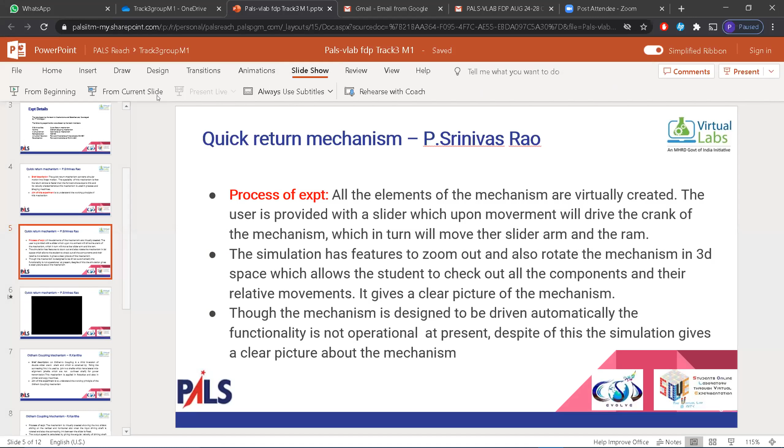The group has a mentor, Mr. Vishwas, and the group has 6 people: myself Srinivas Rao, Kavitha Madam from Alpha College of Engineering, Mr. Muthu Krishnan from KIT, Mr. Ramchandran from KIT, Mr. Arivamani Ravanan from KIT, and Mr. Paramasivan from Rajalakshmi Institute of Technology.

The lab we chose is the Mechanisms and Robotics Lab, developed by IIT Kharagpur under the mechanical engineering branch. We chose this lab because future applications will be robots, and the mechanisms supporting robots are very important, forming the backbone of robotics. These are also applied in many other applications. The simulations in this lab work fine except for a few errors; most of the experiments work very well, so that's why we chose this topic.

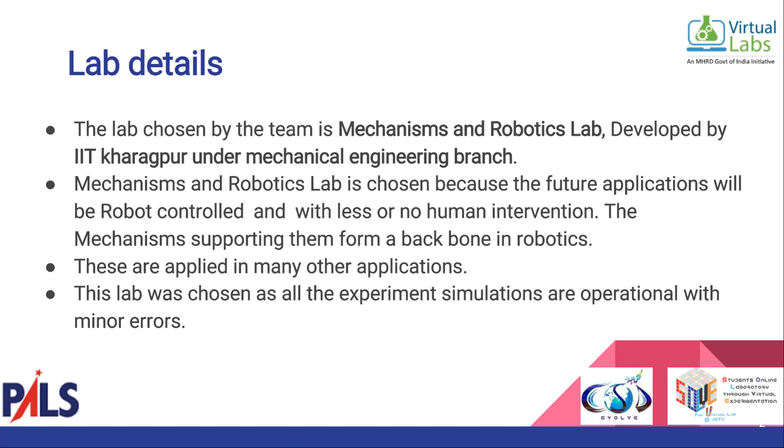The team chose the following experiments to work with. I chose the quick return mechanism. Madam Kavitha chose Oldham coupling mechanism. Muthu Krishnan chose cam follower mechanism. Ramchandran chose KGP50. Arivamani Ravanan chose forward kinematics and Move Master RM501. Mr. Paramasivan chose forward kinematics of Puma 560. These are the experiment details.

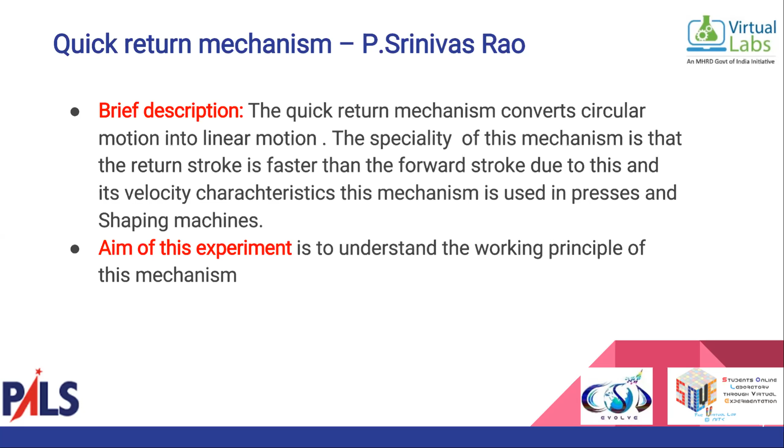I'll quickly complete my presentation, then ask the others to participate. I have taken the quick return mechanism. This mechanism converts circular motion into linear motion, that's its basic purpose. The specialty of this mechanism is that the return stroke is faster than the forward stroke, and because of this it is applied in many mechanisms like presses, shaping machines, and other machines. The aim of the experiment is to understand the working principle of this mechanism.

In this lab, we can look at the complete picture of all the elements in 3D. We can also move the slide and the crank so we can see all the mechanisms moving interrelatively, giving a complete picture of this topic. Except for that, it doesn't run automatically. Though the functionality is shown as if it can run automatically, it is not, but we can see everything in this experiment.

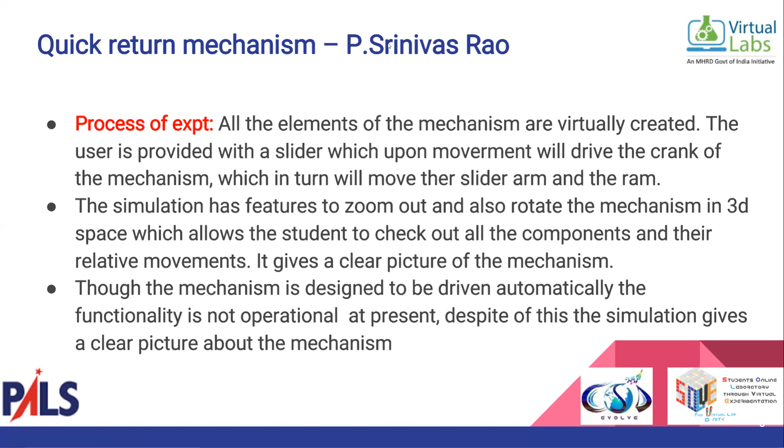Now I'll try to play this video I generated. One second, let me just... I don't know whether the video will play here or not. I don't think the video is playing. I'll play the video from our... other... Not happening.

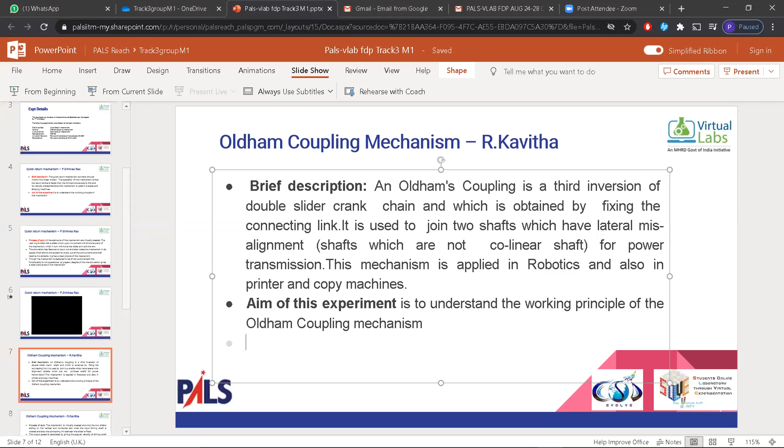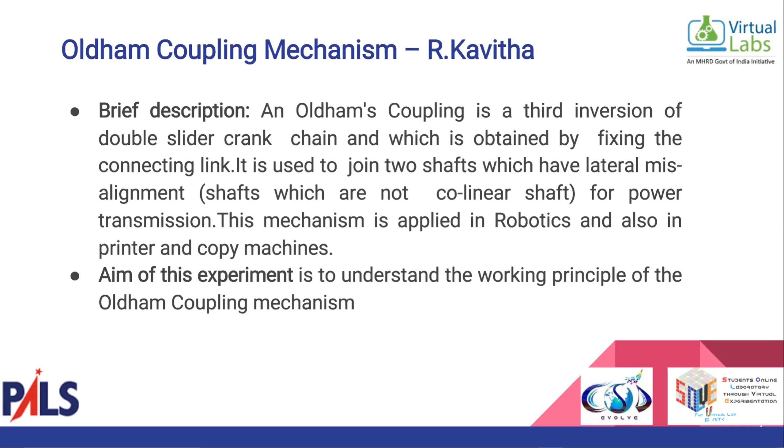I'm R. Kavitha from Alpha Engineering College, assistant professor, and I'm going to discuss the Oldham coupling mechanism. It's a third inversion of double slider crank chain, obtained by fixing the connecting link between the two sliders. It is used to join two shafts which have lateral misalignment, that is, their centers are not collinear, not in a straight line axis. For power transmission, we use Oldham coupling, and this mechanism is applied in robotics, printers, and copy machines. The aim of this experiment is to understand the working principle of the Oldham coupling mechanism. Can you go to the next slide?

And here in this particular V lab, we have seen the simulation, and it is clearly visible, and it shows the two sliders sliding on a vertical and horizontal slot when the input driving shaft is rotated, and also the connecting link which is fixed in between the sliders. The output sliding speed is calculated using the value omega of the input driving shaft in the simulation.

So the simulation has features to rotate the mechanism in 3D space as well. There is a progress bar, or a point or button, which is used for rotating the input shaft.

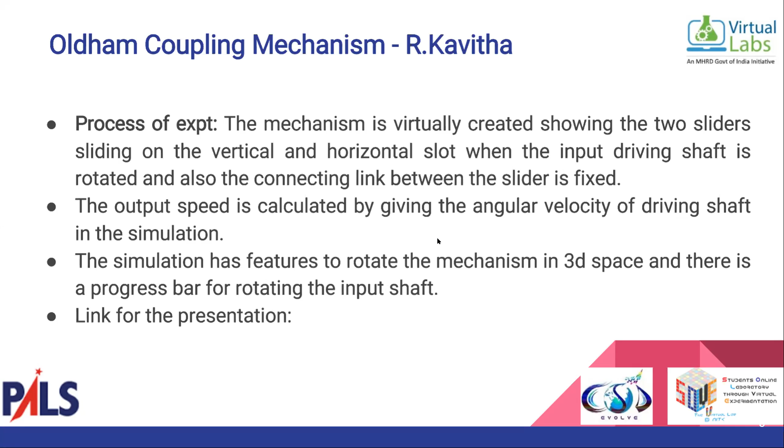Good morning to all. Am I audible? Next person can follow. Good morning to all. Am I audible? Yes, sir, you are audible. A little bit of clarity is required from your voice. The voice is low, sir. Now is it okay, sir? Hello? It's low only, sir. So can you put the mic near to your mouth? Yeah. Okay. Good morning to all.

I am Dr. Muthukrishnan from Kalaignar Karunanidhi Institute of Technology, Coimbatore. Today I am going to present about the mechanism of cam and follower. Cams are mechanical devices which are used to generate curvilinear or irregular motion of mechanical elements. They are used to convert rotary motion into oscillatory motion or oscillatory motion into rotary motion.

So here it consists of three elements. One is a driver member known as the cam, second is a driven member called the follower, and a frame which supports the cam and guides the follower. So the procedure here is a simple simulation technique. There is no experimental setup available here.

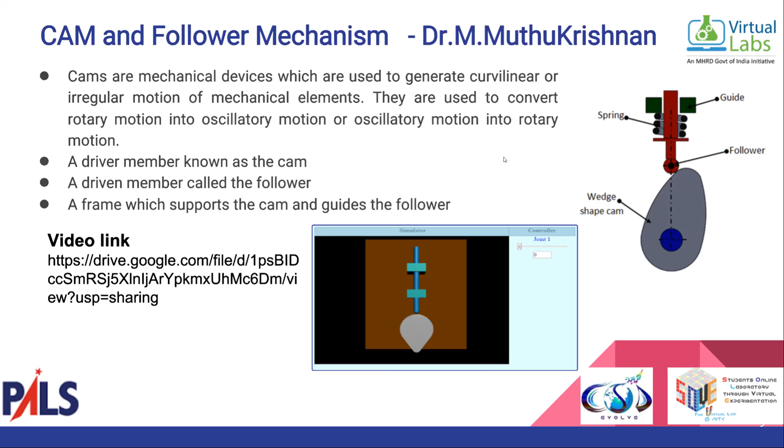Okay, sir. Now I'm going to present the introduction about KGP50, which is an industrial prototype robot. This robot has been available for transferring technology and for education purposes. And the robot has been planned for use in the development of an intelligent driver vehicle interaction simulator.

In order to have a driving mechanism, we need to have control for a number of axes. This consists of 6-axis operations, and it is able to withstand a 50 kg payload, with a reach of 1.5 meters, and a maximum speed of 1.5 meters per second. So these are the initial specifications.

Using this, we are able to move according to our wish, because the maximum degrees of freedom available there is 6. Here, we are using all 6 degrees of freedom in order to obtain the maximum. Here, each and every axis is able to be rotated.

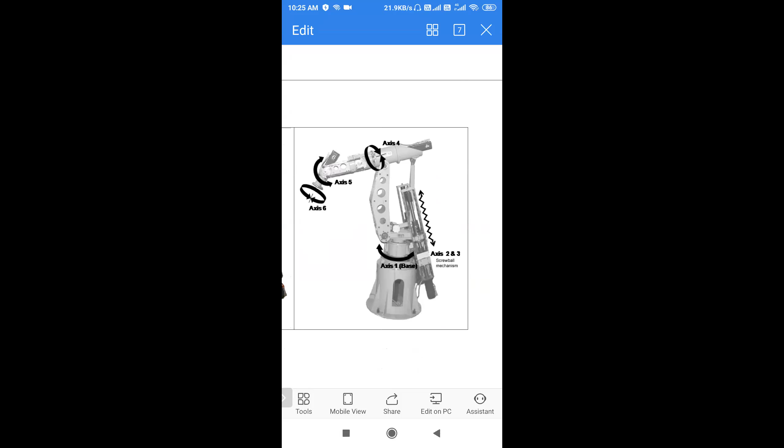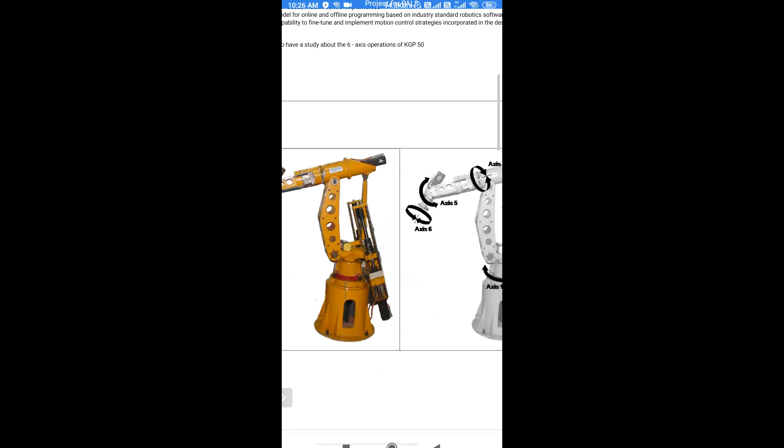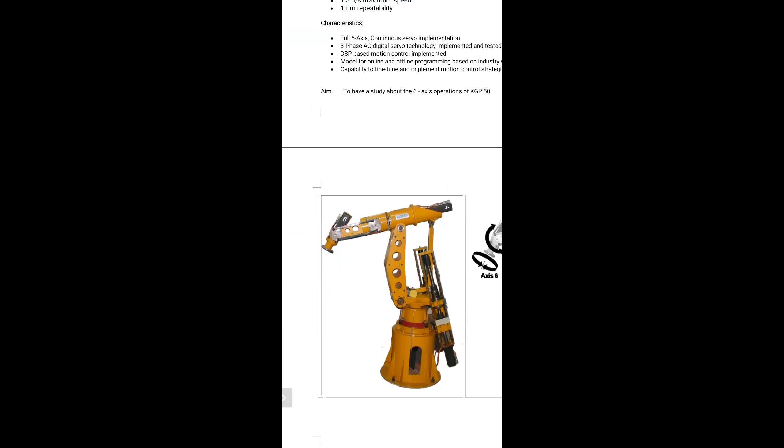This robot consists of 6 axes. The first one is the vertical axis, then axis 2 is available over here, which can make a rotation in this area, the third axis is available over here, and the fourth one is available. You can rotate this, the fifth one you can rotate this, and the sixth one you can turn a rotary slot which can hold a tool. So in this way we can make 6 rotations, so that you can reach any point.

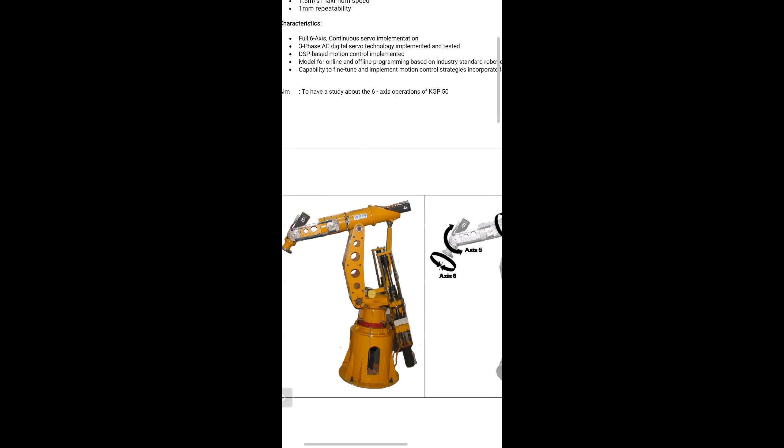It is like a 3D thing. You can achieve any point and do any kind of task using these 6 axes. You can't make everything work at the same time, because it's a very tough task. So first we can try the first axis over here. You can rotate it to the position, then utilize the second axis, then the third axis, then the fourth axis. Each can be controlled over there.

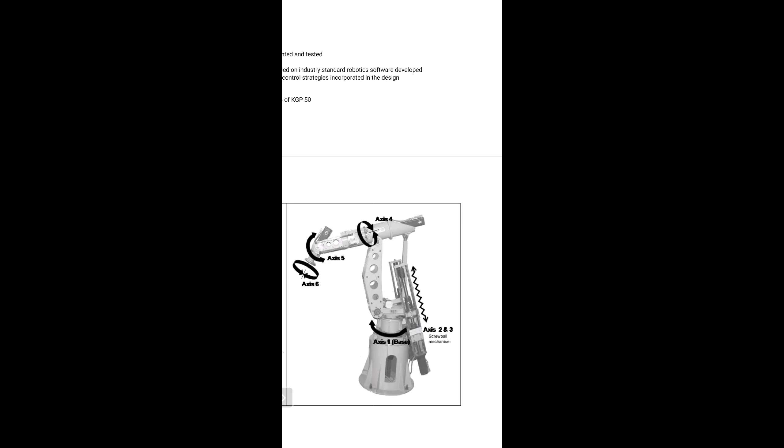If you view the animation video, you can get how it is working. You can reach any point in the space within the given reach. That is the major advantage of it. If you are effectively utilizing that, you can achieve a lot of things. Even for COVID and all those things, we can use this kind of arm.

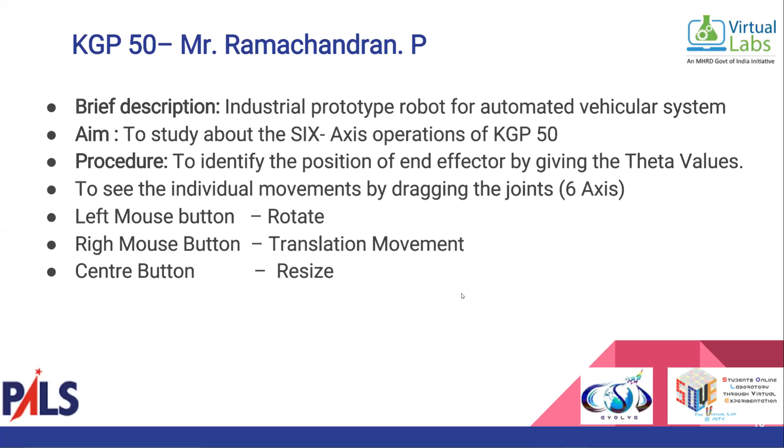Can I display the video? No, that's okay. I think they will privately see the video. Okay. We have a time slot of about 5 minutes left. Within that, your team has to complete the presentation. Okay, sir. I'll move to the next person. Mr. Arivumani Ravanan, please continue. Sir, is it audible for you? Yeah, you're audible. Fine. Hello to everyone.

I am Arivumani Ravanan from KIT, Kalaignar Karunanidhi Institute of Technology, Coimbatore. My presentation is about the simulation-oriented experimental exercise of an articulated trainer robot named Mitsubishi MoveMaster RM501. This is a basic level industrial robot with 5 rotational joints having 5 degrees of freedom. One concept we are using here is forward kinematics. It refers to the use of the kinematic equations of a robot to compute the position of the end effector from the specified values for the joint parameters.

Kinematic equations are generally used for robotics, computer games, and animations. The essential concept of forward kinematic animation is that the positions of particular parts of the model at a specified time are calculated from the position and orientation of the object, together with any information on the joints of an articulated model.

Regarding the construction, if the object animated is an arm with the shoulder remaining at a fixed location, the location of the tip of the thumb would be calculated from the angles of the shoulder, elbow, wrist, thumb, and knuckle joints. Three of these joints, the shoulder, wrist, and base of the thumb, have more than one degree of freedom, all of which must be taken into account. The working axis and degrees of freedom have been explained previously by Professor Ramachandran, so I won't go into that much.

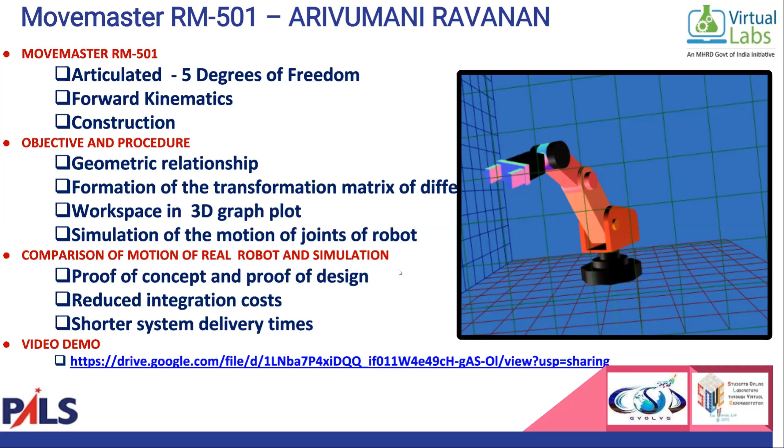The experiment that I have taken is forward kinematics of Puma 560. Kinematics is the study of relative motion between the links. Forward kinematics deals with the relationship between the individual joints of the robot manipulators, to determine the position and orientation of the end effectors. That is the main objective of this experiment.

In this forward kinematics, we are going to consider the open chain mechanism. If you take the 4-bar mechanism, it's a closed chain. But here the robotic end effector arm is going to be an open chain. Here we move from the base towards the end effector, so we call it forward kinematics. Puma is nothing but programmable universal machine for assembly.

This machine was developed in the year 1978 by Victor Scheinman at Unimation. There are various variations of Puma 560. Puma is available in various series like 260 series, 560 series, and 761 series. The main aim of this experiment is to determine the position and orientation of the end effectors from the base. It is an industrial robot arm which has 7 links, 6 degrees of freedom, and all the joints are rotational joints.

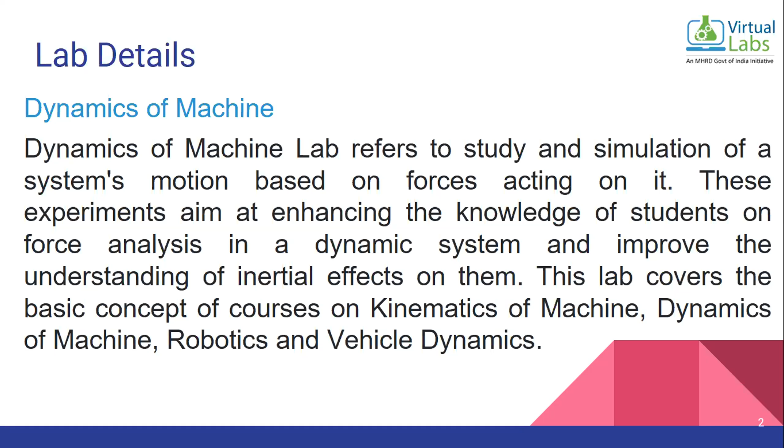So with this, I move on to the lab which we have chosen, dynamics of machines. Dynamics of machines is used to study the basic motions and forces which are acting on the system, especially on dynamic systems. This kind of lab is used to understand the basic concepts to design robotic or vehicle dynamics, which will definitely be useful to analyze the forces on the system. So with this, the following experiments like governors, balancing, and disc type or flywheel come under this lab.

So I have taken the Hartnell governor. Basically the governor is used to change the speed of the system based upon the applied load. The aim of this experiment is to visualize the working and the effect of speed change on the Hartnell governor through the simulation. The basic difference between the Hartnell governor and other governors is that it is actuated using a spring. So the Hartnell governor is controlled by spring. It has crank levers, balls, frames, and all.

Based upon the applied load, the speed gets increased so that the radius of rotation of the balls increases, and the roller lifts the sleeve against the spring force. If the speed decreases, the sleeve moves downwards with the spring force. So it transmits the movement to the throttle valve. Based upon that, if we are taking an automobile vehicle, the fuel injection takes place. So this is the basic concept behind the Hartnell governor.

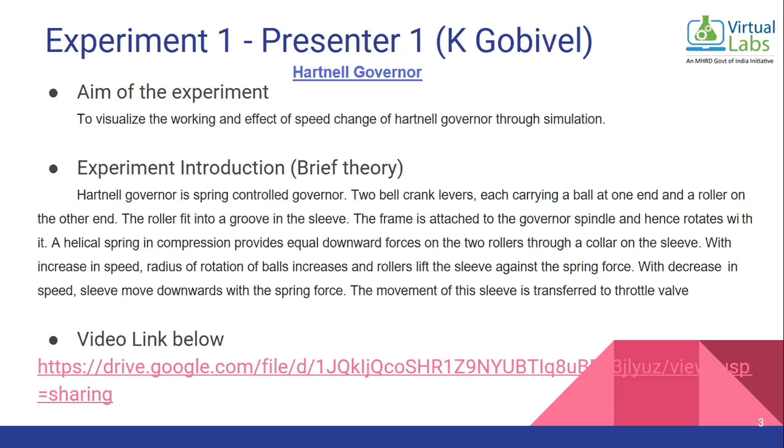Basically the procedure: we can change the mass from 1 to 6 kg, and change the speed from 365 to 400 rpm. There are two positions, a minimum position and a maximum position. With this we can also get the free body diagram for the governor. From this experiment, the user is able to derive the governing equation for the system. Based upon that, we can identify the stiffness equation, throttle distance, and the radius of rotation and all.

So we can easily calculate based upon the manual calculations. So from the experiment page, we have taken a pre-test and a post-test and all. So definitely this will enhance the evaluation procedure for the students.

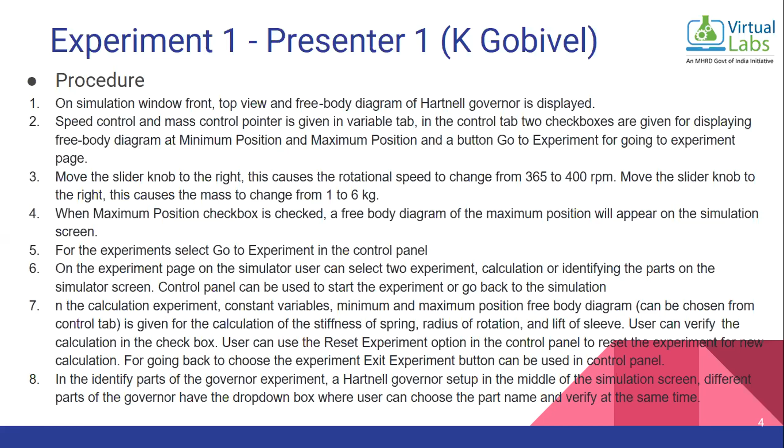So, I'm going to present the experiment on Porter governor. The aim of the experiment is to visualize the working and the effect of change of speed in the Porter governor through various simulations. So, moving to the experiment, a lot of experiments are there. One is part identification, and the other one is working simulation. Here the height of the governor with respect to the rotational speed can be calculated, and the length of the arms and rotational speed of the spindle can also be examined.

So to note down the minimum and maximum height of the governor with respect to the rotational speed, we can calculate. And this was the first time I have witnessed this virtual lab. So moving to the comparison between a virtual lab and real lab: in a virtual lab, all the experiments can be performed virtually while staying anywhere without going to the lab. So with that, we can save a lot of consumables. Since we are doing a lot of simulations repeatedly, the students can easily understand the concept of that particular experiment.

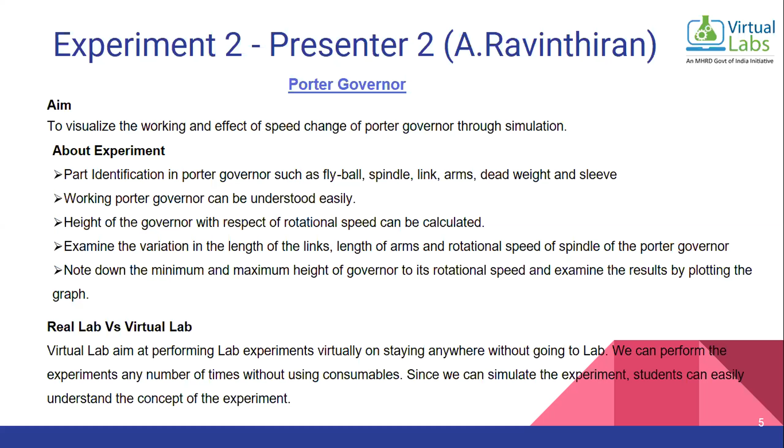Next slide, please. So moving to the procedure, in the simulation portion, two right hand side tabs are available for varying the speed and mass. By varying the speed and mass, the height can be generated. The simulation clearly shows, under which speed and under which mass, what will be the height of the governor.

We have to move the slider knob to the right under the RPM and mass to see the change in the animation in the Porter governor. There we can clearly see the change of height. And here there is a show graph tab. By clicking this tab, we can see the clear picture of the graph, which will be height versus RPM.

And for the experiments, we have to go to the experiment. Under the experiment, we are having two tabs. One is calculation and another one is part identification. In the calculation part, there will be a constant variable, and a height and mass graph is given for calculating the mass. The calculation can be done using the formula shown on the right hand side, that is N² = (m + M)/m × 895/h. Based on this formula, we can calculate the speed, height and the mass. So like that, a lot of experiments we can do, and manual calculation can be checked with the simulation calculations.

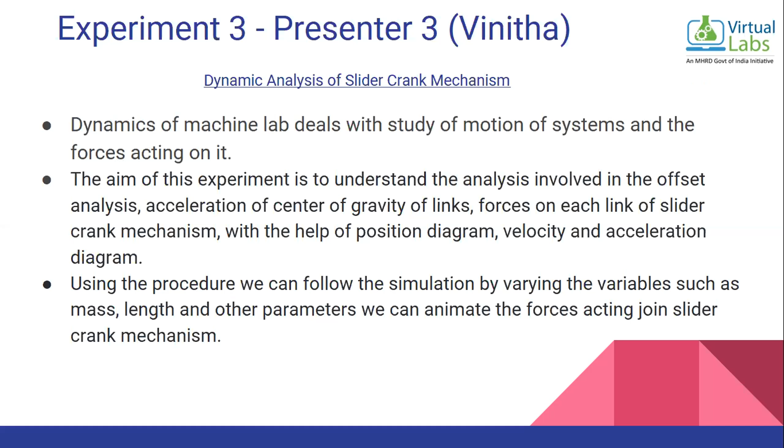So using the procedure. Next slide, sir.

Using this VLab virtual labs, there is a picturization of a position diagram, velocity diagram, and acceleration diagram. There are variables, so we can vary the mass M2, M3 and M4. We can also vary the angle between them. Using the control tabs, we can control the variation, pause and animate the videos. That is how the rotary motion is converted into linear motion.

Using this link, I have clearly explained the dynamic analysis of the slider crank mechanism. Thank you.

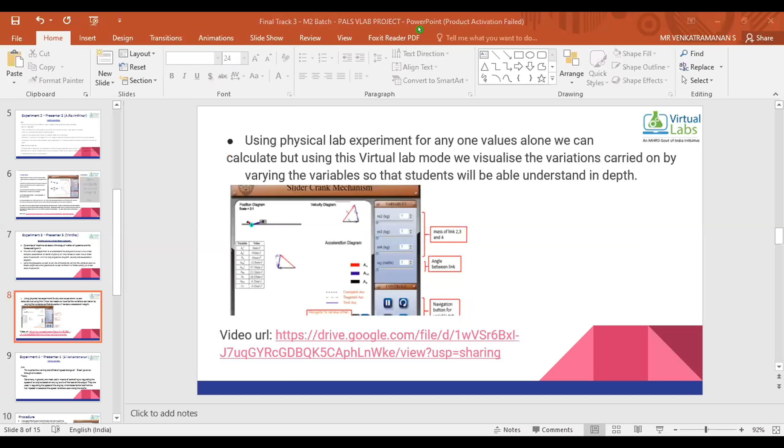I have taken the experiment of Proell Governor to understand how virtual labs are working. We found that this virtual lab is very useful for our students. We have given tasks for subjects like fluid mechanics, solid mechanics, etc. Students are very interested to learn on their own, which makes them study more and become confident enough in the subject.

So today I have taken the Proell Governor. The aim of the experiment is to understand its working principle and to calculate the parameters based on the given details. The Proell Governor is basically used in balancing the speed of the engine. It controls important parameters like fuel injection, etc.

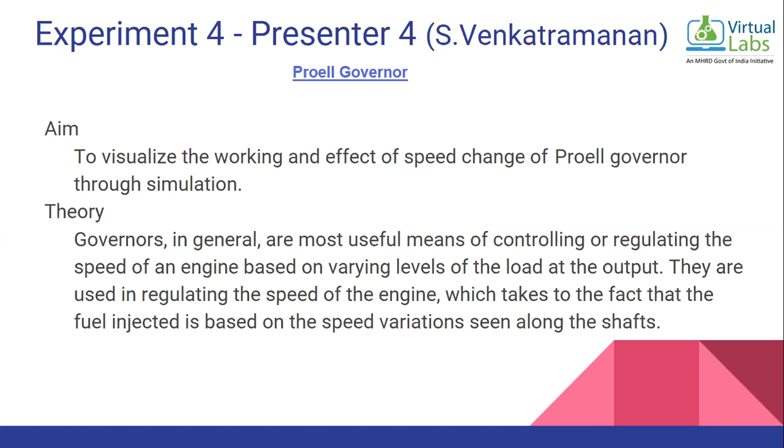In the virtual lab website, we have a very detailed explanation of the theoretical part with some derivations, which give us the final equation to calculate the parameters. We also have a procedure and a pre-test and post-test for students to gain much more confidence on this topic. So I have taken a simulation part.

We have two different options in this experiment. One is to identify the parts, which is necessary for students if they want to write a descriptive type question. The experiment of identifying parts might help them.

And the other part was the calculation. In the calculation part, there are different types of calculation. The one shown in the bottom right corner gives details like FM by BM, the capital M, and of course RPM and mass are also given. So what we are supposed to do is calculate the height of the Proell Governor.

In the video link, I have also shown the calculation part. I made a sample calculation based on the given details, and I calculated the height. We also have a checkbox where students can check whether the answer is correct or not.

I found this experiment very useful, and as a faculty I studied it long before. It was an eye opener for me to understand the Proell Governor in a better way. I thank you for giving this opportunity. The video URL is given, and the detailed explanation of the Proell Governor is mentioned in the video. Thank you for the opportunity, Gopi.

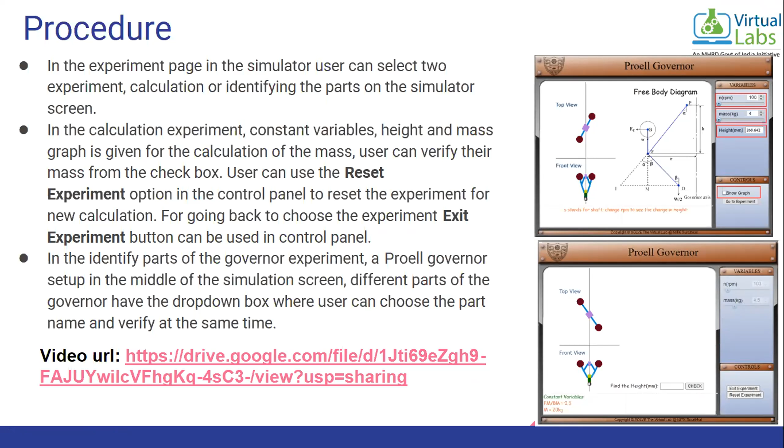Under DYM lab, I want to present an experiment on rim type flywheel. First of all, you should know what is a flywheel. A flywheel is nothing but an energy storage device. The flywheel stores energy when the system has excess energy, and releases energy when the system wants it. That is the function of the flywheel.

The first aim of the rim type flywheel experiment is to calculate the moment of inertia by varying the mass and radius of the flywheel, and compare the experimental value and theoretical value of moment of inertia.

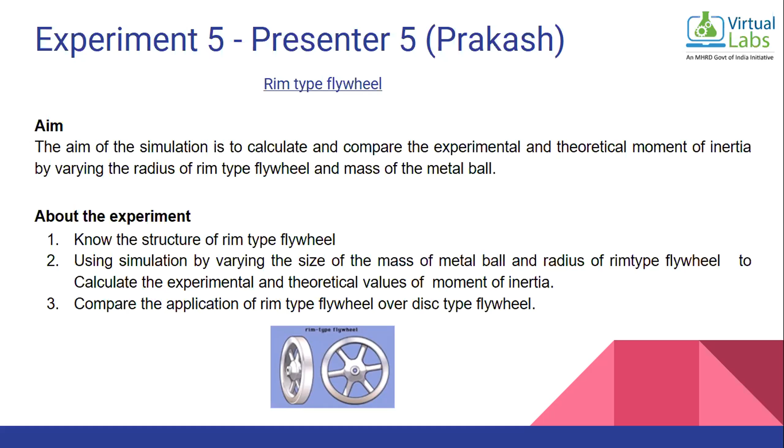First, about the experiment, you should know the structure of the rim type flywheel. You can see the 3D diagram below, which we put using simulation. In the simulation part, we vary the size of the mass of metal and the radius of the flywheel. We can calculate the moment of inertia using a formula, both theoretical and experimental. Finally, we have to compare the application of rim type flywheel over disc type flywheel. So next slide, sir.

The flywheel does not start immediately. It takes some time to start due to moment of inertia, which we have to calculate. Theoretically, we calculate it using the formula I equals mr square, where capital M is the mass of the flywheel and r is the radius of the flywheel. Using this formula, we calculate the theoretical value.

One is r, another is m. R is the radius of the flywheel, and m is the mass of the metal ball. We can adjust these two variables and calculate both the theoretical and experimental values.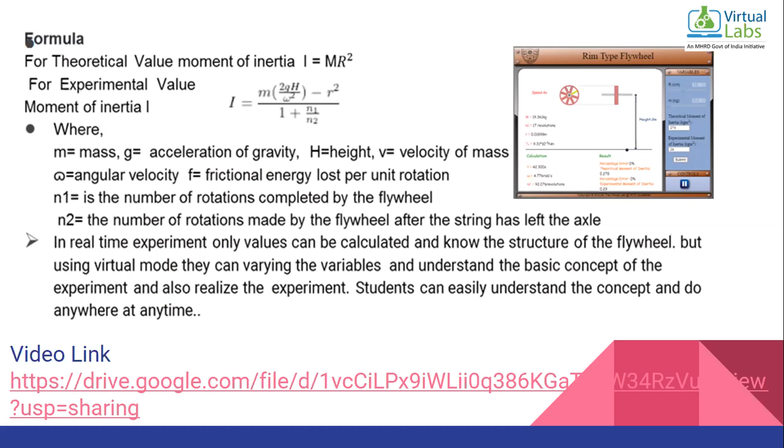Ganesan sir, hello Ganesan sir, Dr. Ganesan sir. Hello. Yes sir, you are audible, please speak sir. I think Ganesan sir is not in the participants list. He is there sir, he has unmuted his mic but we are not hearing him. The voice is too low, I think. Ganesan sir, internet is not stable. His audio is having some problem.

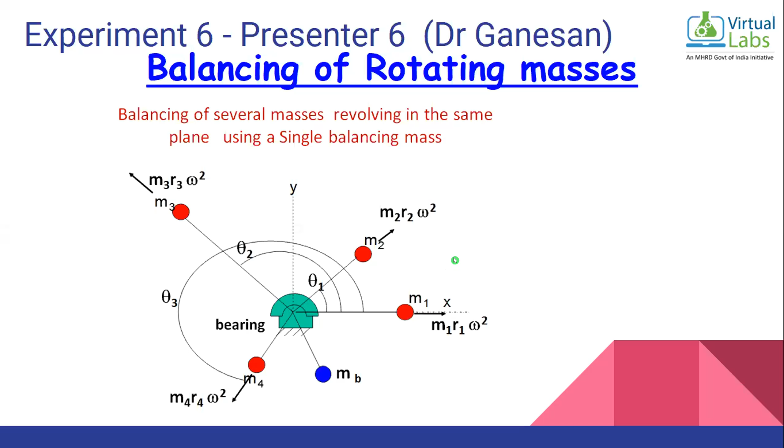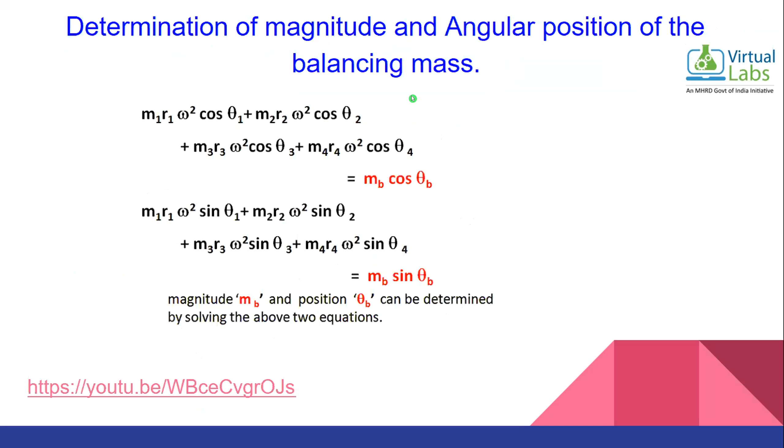Gopiel sir. Yes sir, did you try calling him sir? Yes sir, he is not picking up the call. Okay sir, I think he might be busy. Sir, he has done the experiment and he has loaded the YouTube link also. I think we can take the other batches. Yes sir, thank you, okay. I think we have some technical problem. Yes sir, okay, so it's fine. So people have done the hard work. We'll go for M3. Well done sir. Well organized. Thank you, thank you sir. Thank you so much.

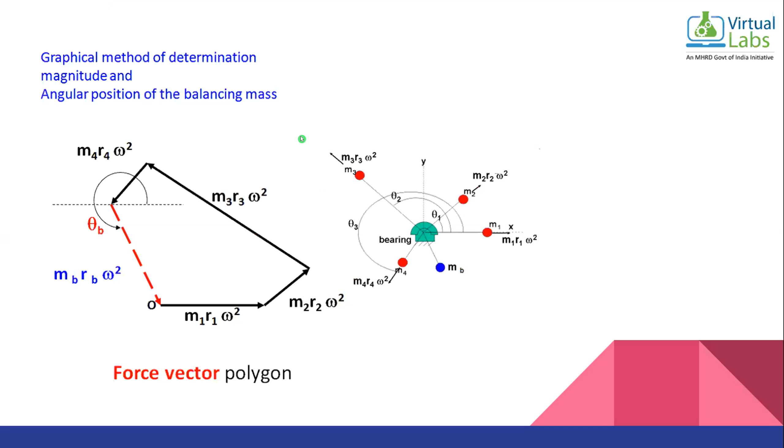Sir, can you able to see my screen? Yes sir, we can see your screen. One minute, I'll switch on the full screen actually. How to do the full screen? Because I'm trying, it's not working. One minute.

Okay sir, I can continue as it is. After that I can try to do the full screen. Excuse me sir, excuse me sir. Yes sir, just go to the top menu tab, home inside, and you can see the slideshow tab. Just pick that one and start from the beginning. Okay, thank you for your help.

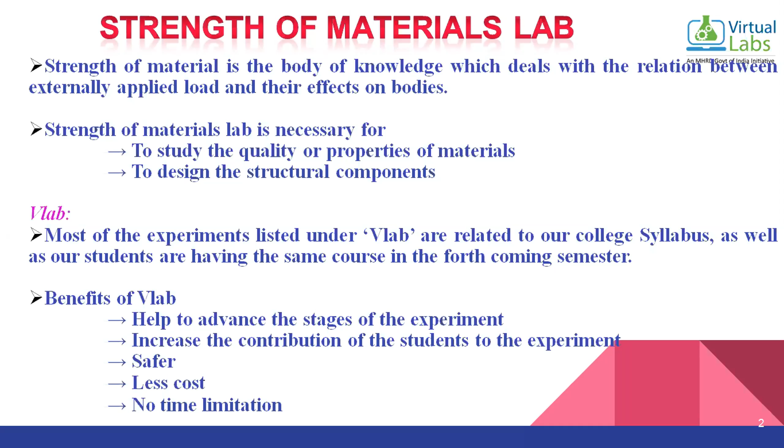Thank you, Dr. Wilson. This is Prem Kumar from Sairam Group of Institution. Today I am going to present about Brinell hardness testing. There are different types of testing for hardness. The unique property of the Brinell hardness test is that, compared to others, its indenter makes the deepest and widest indentation.

This is for finding the hardness of different specimens of different kinds. Hardness can be defined as resistance to indentation, and this is determined by the permanent depth of indentation. You give a fixed load or force by the indenter, and the smaller the indentation, the harder the material. The indentation hardness value is calculated by the depth it achieved.

The Brinell hardness test method is used to determine the hardness defined in the ASTM E10 standard. The major objective of this test is to examine the deformation of the metal specimen when hardened steel is pressed under different load conditions. By using indentation, you can determine the properties of the metal.

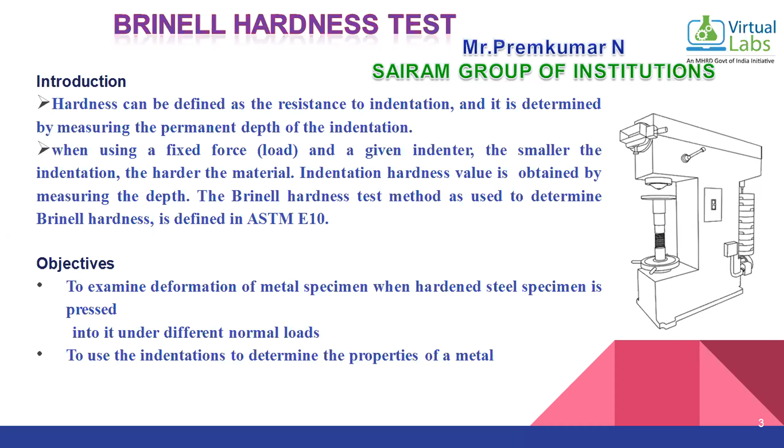Okay, now let's move forward—sir, kindly change the slide. This is a very simple procedure. The Brinell hardness testing machine is having...

Actually, before getting into the procedure, I will tell what are the integral parts of the machine. Basically, it has a supporting table and elevator screw, anvil, and in the backside of the machine, that is the back end of the machine, there is a hanger suspended for load application.

So see, in this particular PPT, I have taken cast iron as a specimen, because for cast iron as a specimen, by standard the P value is fixed. The load value is 3000 kg. So the test has been taken from 250 kg to 3000 kg. Now the specimen is having a

wheel that has been provided in the bottom end, because when you are placing the specimen, it has to be placed on the table, and it has to be elevated by using the elevating screw, up to where the indenter touches the particular specimen, and there should be some small 5 mm gap between the indenter and the test specimen before application of the load. Okay, now you can see this, the steel ball during this period moves to the position of the sample and makes an indentation.

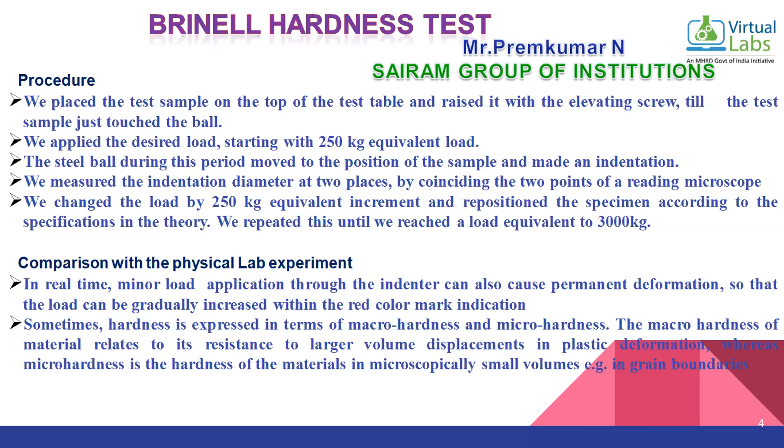Thank you very much. Sorry to intervene, Vishwas. This is Sujata here. Just wanted to check if Professor Dr. Ganesan's audio is fine. Sir? It is not audible when the presentation is happening. Yeah, I in fact tested it in the main session. It was fine. I brought him here. Dr. Ganesan, are you there? Yeah, I am here. Are you able to hear me? Yes, right now, yes. Vishwas, it's fine now. I have given a chat message also to Vishwas. Okay. So sorry about intervening. I'm leaving the room.

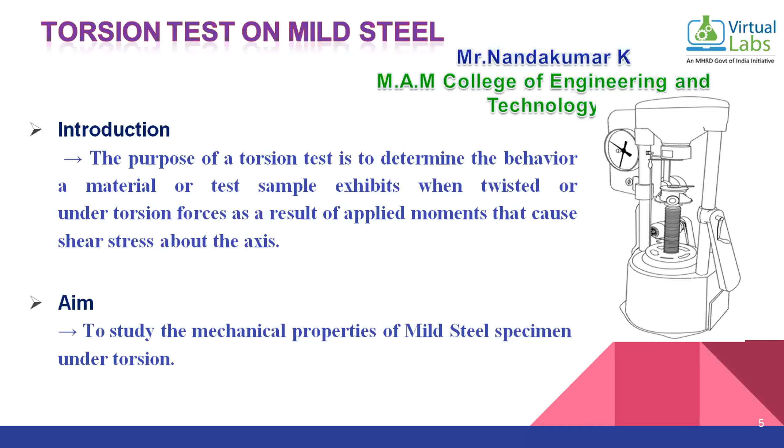Sir, switch to the next one. This one, sir? No, sir. Second slide. Previous. Second slide, 6. Okay. Thank you, sir.

After preparing the specimen and measuring the diameter and the length of the specimen, we have to draw a longitudinal line over the specimen where the torsion is to be conducted. This longitudinal line over the specimen indicates how the twisting or torsional force is applied and how it twists, which we can easily see in the torsion machine.

These are the very primary steps. The first step is measuring the diameter. The second is measuring the length of the specimen. The third step is marking the longitudinal line over the specimen. After that, it is placed in the torsion machine and fixed here. There are two buttons, green and red. Green is to switch on the machine, red is to stop the machine.

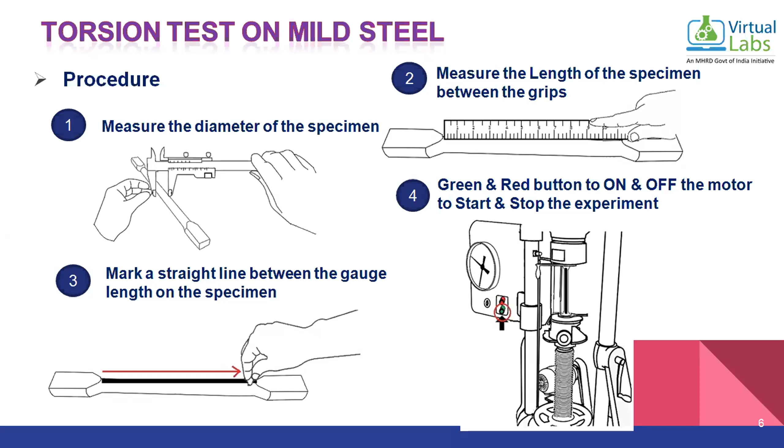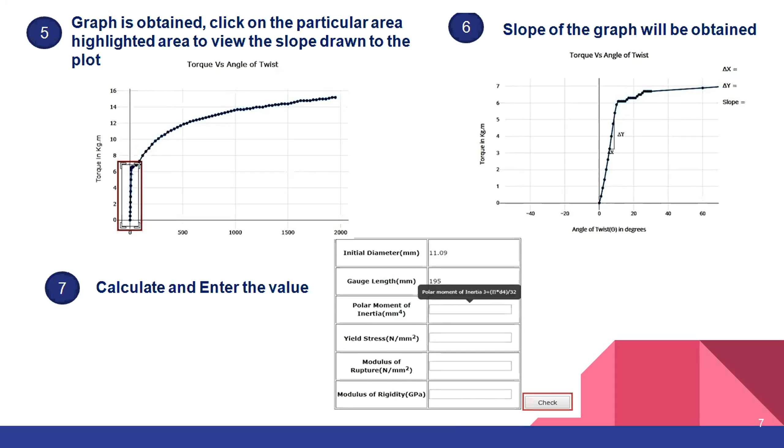Thank you, Dr. Wilson. Myself, Jeeva Sivalingam, MAM College of Engineering and Technology, Tiruchirappalli. First of all, I want to share a few words, because I don't know about the lab; I have never handled this lab. I learned this lab here itself. So what I understand, I'm going to share with you. If you find any mistakes, kindly forgive me.

Okay. So now I'm going to start about the bending test on mild steel. The bending test is normally conducted for the tensile strength of the material. Here I am conducting a bending test on mild steel. Generally, mild steel is used in concrete structures like columns or beams. Basically, this test is carried out by a UTM machine. UTM means Universal Testing Machine.

This bending test is used to find deformation or deflection under varying load. When applying load continuously or gradually increasing, we can easily find the deformation, and where the deformation forms under varying load. There are two types of bending tests. The first one is the 3-point bending test. The second one is the 4-point bending test. Here I conduct a 3-point bending test. So what is my objective? To study the behavior of a mild steel rod subjected to gradually increasing load applied equally on the specimen.

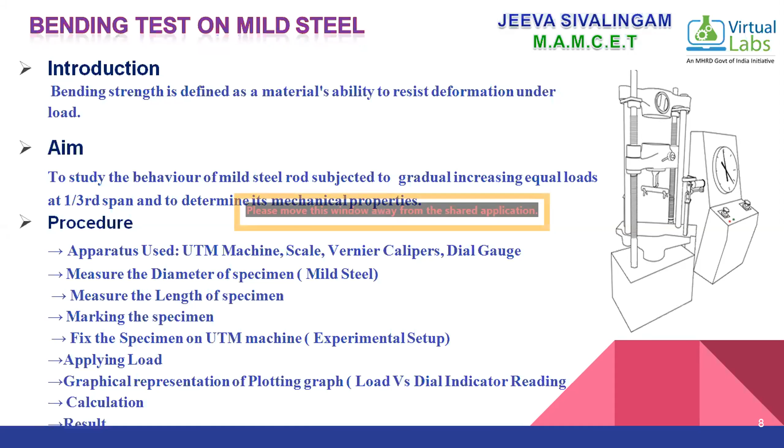When we virtually start the machine to apply the load gradually, it goes 40, 50, 100, 150 or 40, 80. In these kinds of intervals, load is applied gradually and continuously to the machine. On the other side, the reading will be displayed on the screen. Whatever load we are applying will be displayed on the on-screen projector. Next. The readings will be taken at a minimum of 12 or 14 levels. After applying load, when we press the stop button, the virtual machine gives the full readings, and the graph will be displayed on the other side of the screen.

Next, the screen will display the dial indicator with the applied load. The next mode is the calculation mode, where we manually enter the values, and it will display whether they are correct or not. So this is the procedure to conduct the bending test on mild steel. These are the actual procedures.

Now I am going to compare it with the physical lab experiment. This is the online simulator, so everything is displayed in simulation motion, and it is easily understandable. The calculation is very, very easy because the equations, definitions and formulas are all displayed in the theory mode and procedure mode. The main thing is there is no need for stationery like pencils, scales, rubbers, etc., because it's already available on screen. No need for raw materials and hydraulic machines; everything is virtual and simulated in the virtual lab.

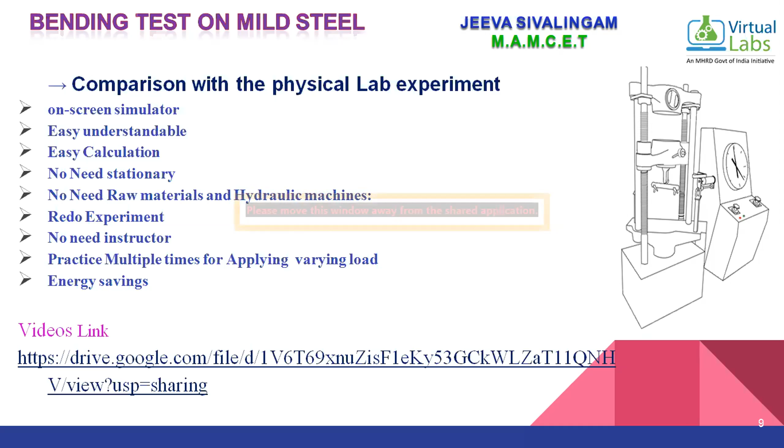I think Mr. Ganesan has to present his slide. So he has to present his slide. So can I present, sir? I am Dr. Ganesan. Yes, sir. Please present.

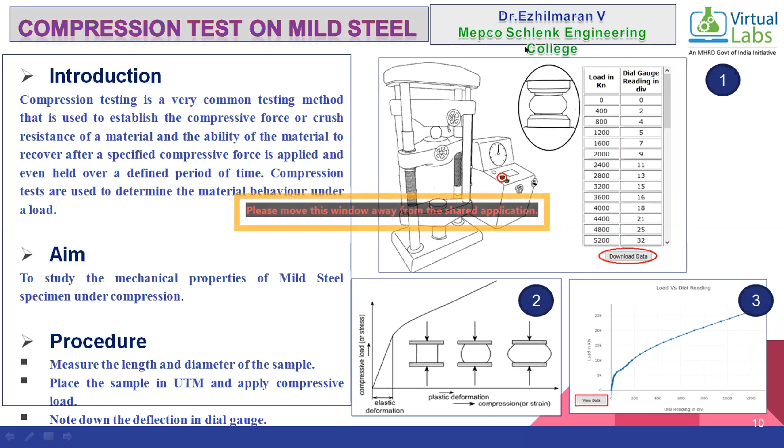So my topic for today's presentation is balancing of rotating masses. All of us know that balancing of masses is very important, especially for rotating equipment and rotating members. We come across various rotating equipment in industry also. For example, a shaft is always attached with some rotating equipment, rotors, flywheel, or it can be a gear. Like that, various members are attached to a rotating shaft.

Due to which a centrifugal force is created by each mass, and if the masses are kept at different planes, then a couple also comes into play, and because of that there will be unbalance in the system. So balancing is very much required. If the member is not properly balanced, it will cause a lot of vibration and noise, and in effect that will damage the equipment in the long run.

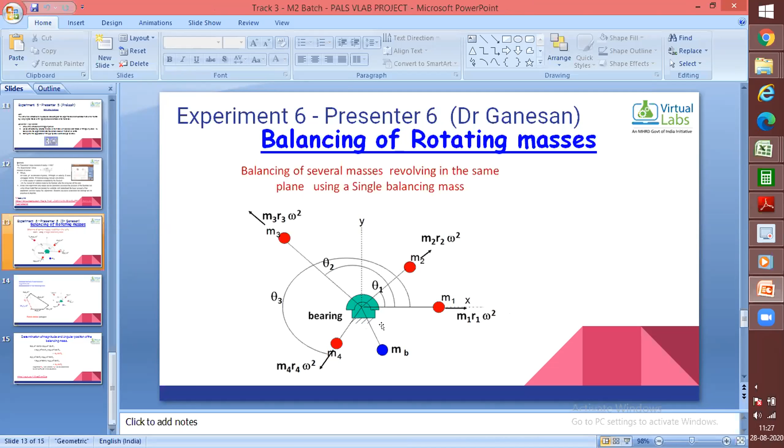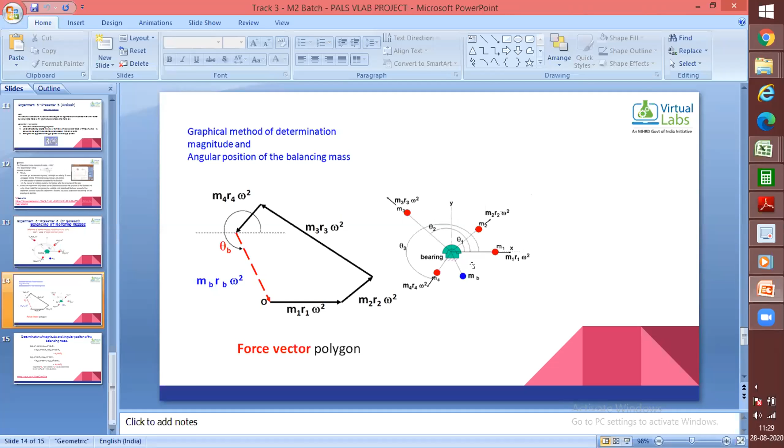So that is also another method by which you can equate. You will have two equations and two unknowns. The two unknowns are what is the balancing mass and at what angle the balancing mass is to be kept. So using this, you can get the balancing mass and the angle. So this is the conventional method of solving balancing of several masses acting along the same plane, which also can be validated through a virtual lab.

So, in the virtual lab, I have considered four masses rotating, kept on the same plane of a shaft, and I have worked out that problem with the conventional method, and I have found the value of MB and theta, and I have given that value here, and I found that in the virtual lab it comes close to the value, maybe around 0.5 to 1% error was shown in the solution. So this way, it will be very useful for the students to work with the virtual lab and to validate the result. So it is very easy to get the result using the virtual lab.

So normally we used to find the values through the analytical method or graphical method, and such things can be validated through the virtual lab. So this is the YouTube link for the virtual lab experiment I conducted.

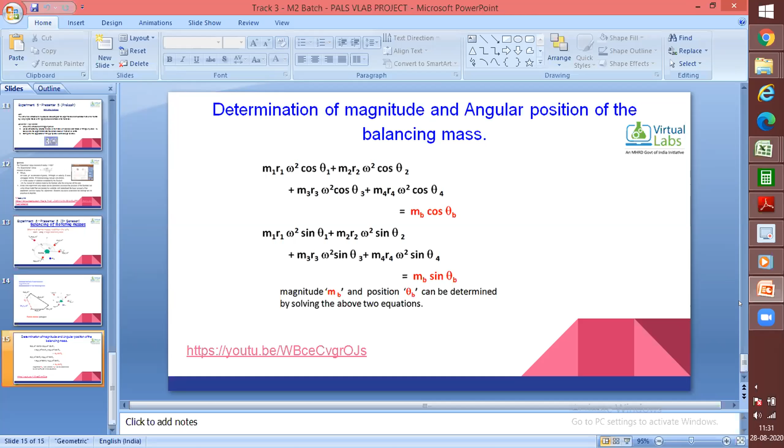Can I open the link, sir? Right now, due to time constraints, I guess we'll see that later, sir. Okay, okay. Thank you for the opportunity. Yeah, thank you. So I guess if the mechanical team is done now, civil can start. That is the first group, CE1, can start with their presentation.

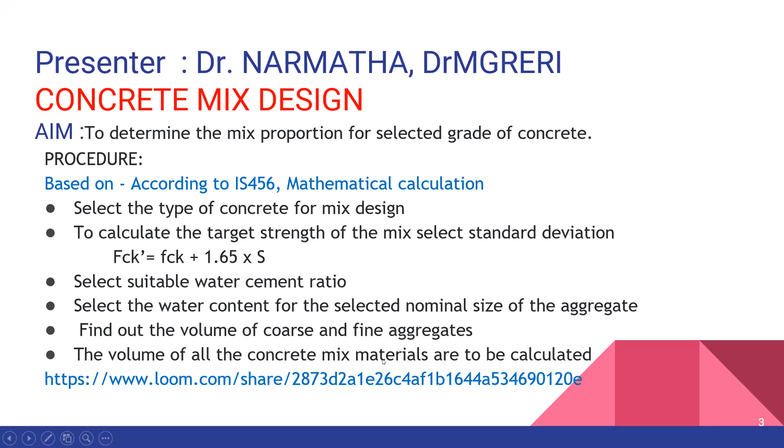So now I will use the simulation in the lab to explain that. So this is the formula.

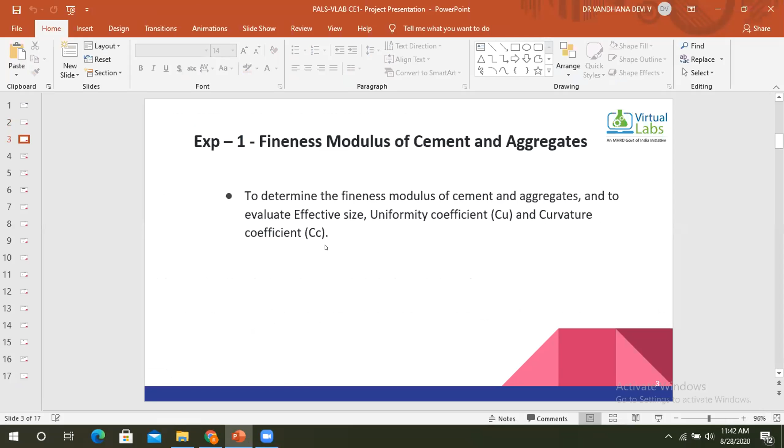The main aim of the experiment is to determine the fineness modulus of cement as well as aggregates, coarse aggregates and fine aggregates, and we'll be evaluating the effective size, uniformity coefficient, and curvature coefficient by conducting this experiment. The theory and other things are explained in detail.

I was a little surprised when I was viewing this. Currently, for third semester civil engineering students, we have a laboratory named Construction Materials Lab, and we also have a theory paper on the same course. During this pandemic, because of this virtual mode, I was a little bit worried about how we were going to conduct this laboratory.

Though we are all civil engineers, we don't usually enter into marine structures at all, but we found all these experiments listed in the construction materials lab have also been listed in the marine structures lab. Looking at the simulation part, I was a little surprised, I would say.

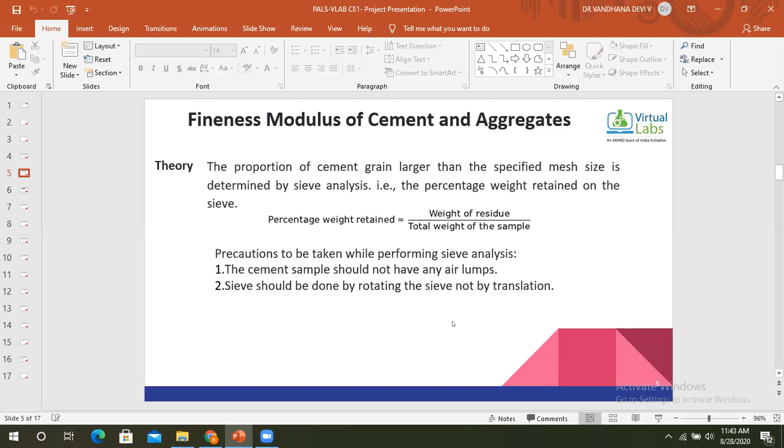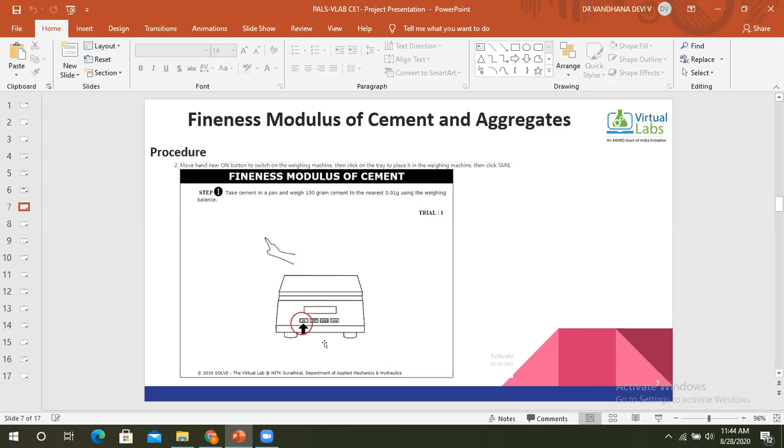Right from weighing and other things, everything is simulated so the student can understand it much better. The theory part is also explained properly, the procedure is given, and even how to switch on the weighing balance is given. I was very much surprised and happy to know how this weighing, everything, is done.

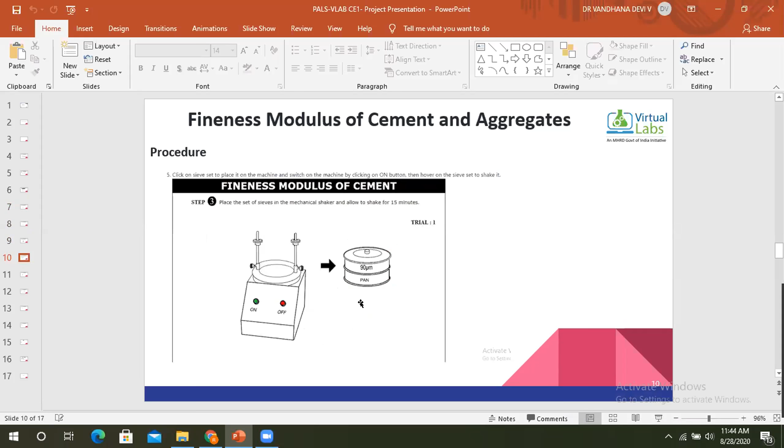We used to place the sieves and pan in the sieve shaker, and it will do the shaking for 15 minutes. All this has been explained properly and neatly so the student will understand how to collect the residue and what formula to use. We can feed some data, check the formula, and obtain the result also. All this stuff has been explained fantastically in the virtual lab. I was very much shocked and surprised, I would say.

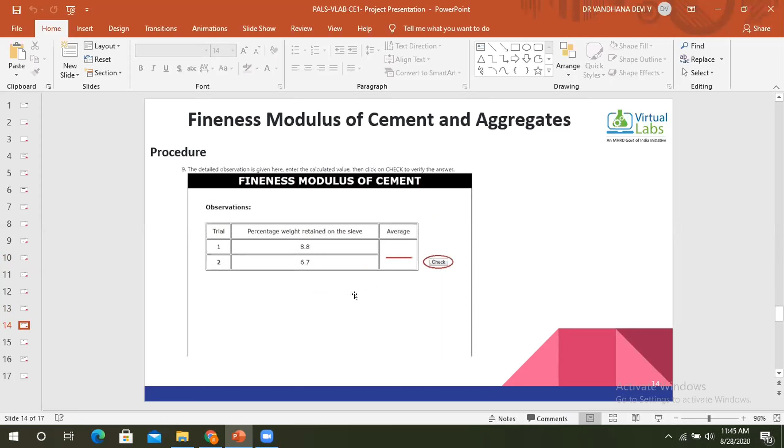Since I'm handling the theory part of construction materials, all these laboratories will definitely give a good idea about cement, the tests to be done for cement, and also with regard to the aggregates. We'll be determining the fineness modulus of cement by using the sieve shaker, and the video link is here. I don't want to take much of your time. Thank you all, thank you so much.

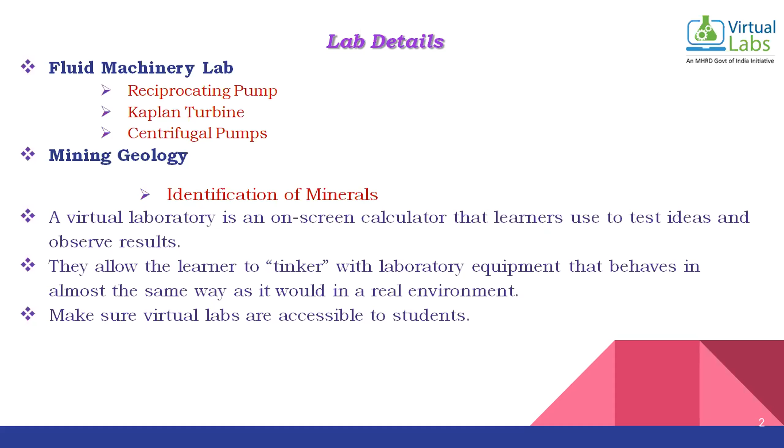The cylinder has a piston, piston rod, connecting rod and the crank. The reciprocating pump has a suction pipe, delivery pipe, suction valve and delivery valve.

The procedure of the reciprocating pump: set the speed of the motor at a constant value by turning the knob, take the delivery head and note the reading corresponding to the discharge. Coincide the pointers by turning the wheel and get the spring balance reading, recording it to determine the torque.

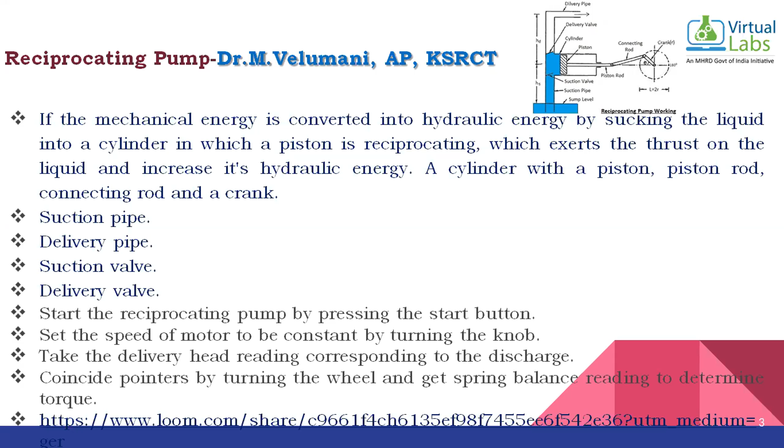The most useful thing for engineering is the virtual lab, understanding how to work in the software, and this is my video link. Next I move to hand over to Dr. K.S.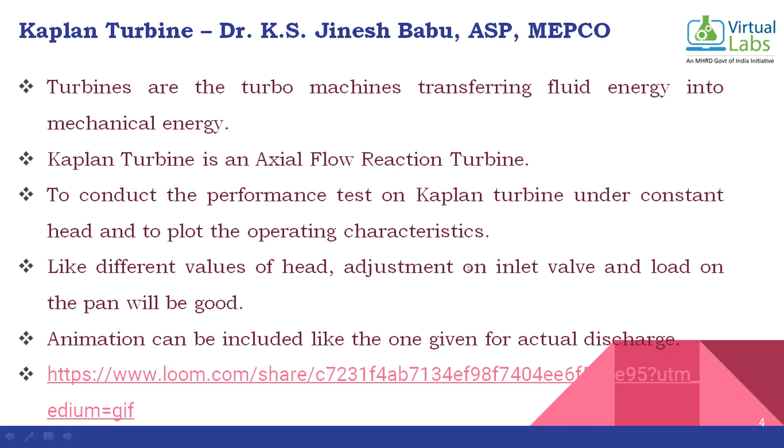I chose the laboratory regarding performance characteristics of centrifugal pumps. First of all, the aim of this experiment is to conduct a performance test on a centrifugal pump and to plot the operating characteristics. Regarding the theory, the centrifugal pump is a rotodynamic machine that imparts energy to fluid by a rotating impeller to increase the pressure of a fluid. These pumps are commonly used to move liquids or water through a piping system.

When the fluid enters the pump impeller along or nearer to the rotating axis, it is accelerated by the impeller and flows radially outward into a diffuser, from where it exits into the downstream piping system. Commonly these centrifugal pumps are used for large discharge through smaller heads.

The fluid enters the inlet of the centrifugal pump under atmospheric pressure and flows into the eye of the impeller. The centrifugal force exerted on the liquid by the rotating impeller moves the liquid away from the impeller eye and out along the impeller vanes to their extreme tip, where the liquid is then forced against the inside walls of the volute and out through the discharge of the pump. So this is the theory regarding the performance characteristic of centrifugal pump.